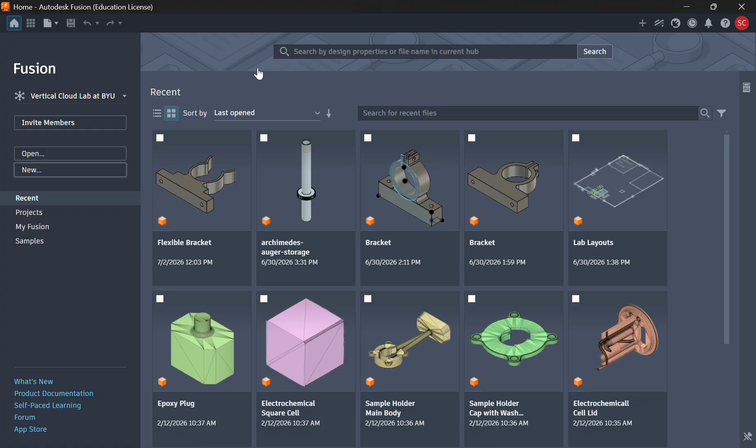We want to make this part as close as possible to the previous version. So I'm going to go to Open here. I don't know if you guys can see this, but I'm opening from my computer. I'm just going to go down to the auger bracket and bring it in.

Now this is a step file, which is nice. An STL file works, but it's very difficult to work with. Step files, CAD software really just recognizes really easily.

So I'm going to go up here to this measure tool and click on this face and measure that in relation to this face. We got, okay, that's 60 millimeters across, that kind of thing. So step files are really easy compared to an STL file.

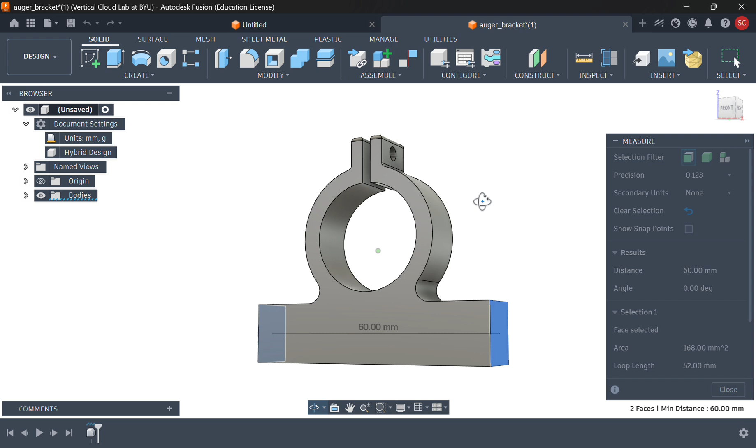With an STL file you have to kind of just guess in a lot of different places, and that is really difficult and takes a lot longer and is not nearly as accurate. For example, this might have shown up as 62 or 58 or something like that, so not as accurate and much harder. Step files are the way to go with this kind of thing always.

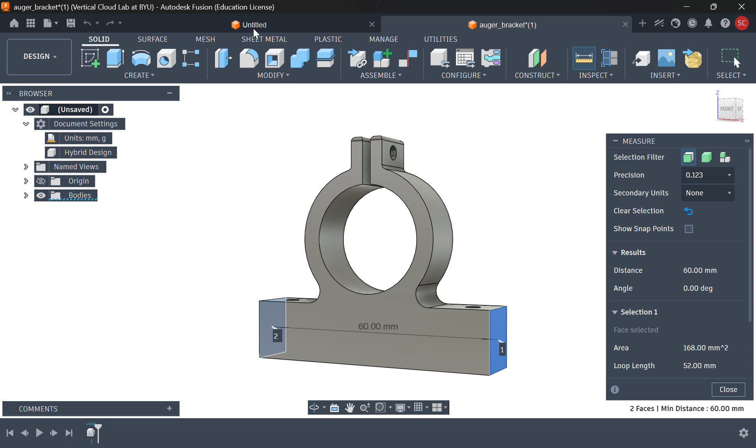Okay, so now we have this new untitled open part. The nice thing about this bracket is that it's not super complicated, and right now it's pretty uniform the whole way through.

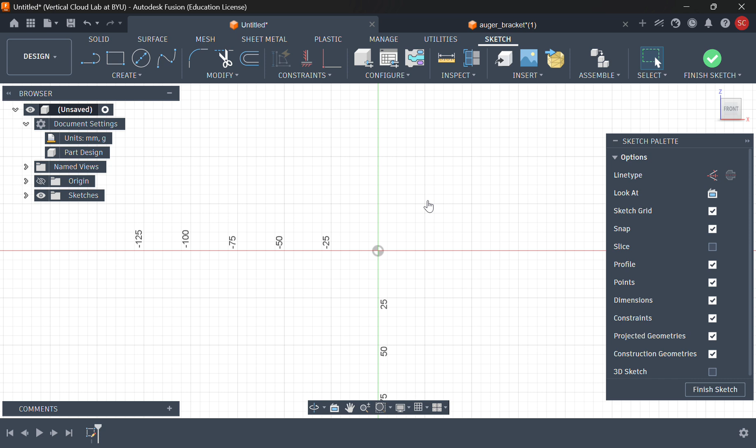So we can just make one sketch and then extrude it, and we'll add some fillets and some holes, but that's just about it. So I'm going to come here and make a sketch. I'm going to put this on this face here, and then start off with a rectangle.

Now this rectangle should be, like we just saw, 60 millimeters across, and should be how tall? 60 millimeters across, and 14 millimeters tall. Okay, nice.

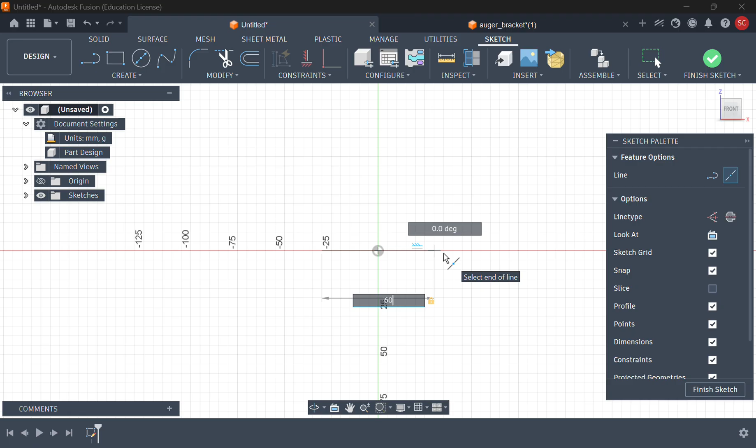So I'm going to start this with a midpoint line here, so that the origin is at the very bottom. Just going to click, so now we have a 60 millimeter line.

I'm actually going to make this one a construction line. Take this up, so we're going to make it 60 there, and then 14 tall.

Great. So now we can come back over here and say, okay, so what else do we need? We need these diameters.

The diameter of this is 33.5. The diameter of the inside is 25.5. Just to check there: 33.5, yeah 25.5.

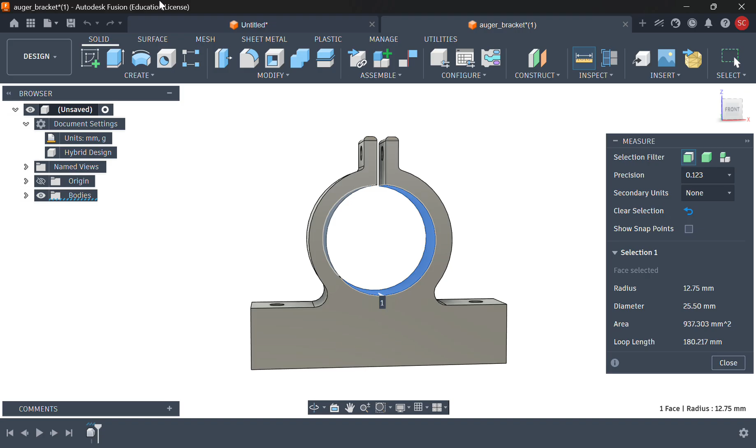Let's see, so now I'm going to come up here and make a circle. From up here, I'm not going to worry about the distance yet, but 25.5 there, and another one, 33.5. There we go, it's looking pretty good.

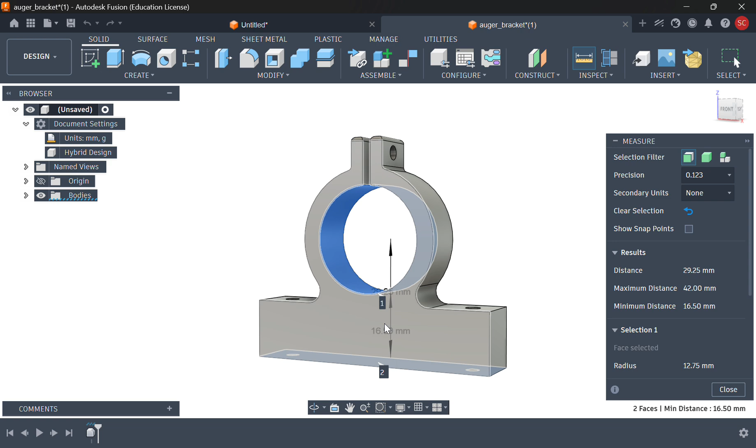Yeah, that's great. So now we need to know how far up this is from here. The hard thing about this is that it gives us two different ways to do this: we can either have 16.5 up to that bottom rim there, or we can have 29.25 up to the center there. So I think let's go with the 16.5.

You can do this either way, but I think it automatically, let's see, so let's add a dimension. If I go there automatically into the bottom, it's automatically going to do that. So let's say that is 29.25, just to double check.

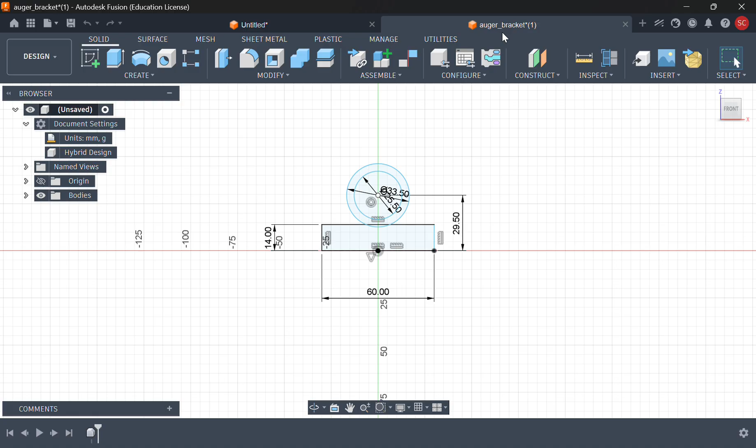That was 29.25. Okay, so then you just come back here. 29.25. Nice. Okay.

It's not letting me zoom in for some reason. One of the reasons that these are still blue is because they're actually not limited to just that axis.

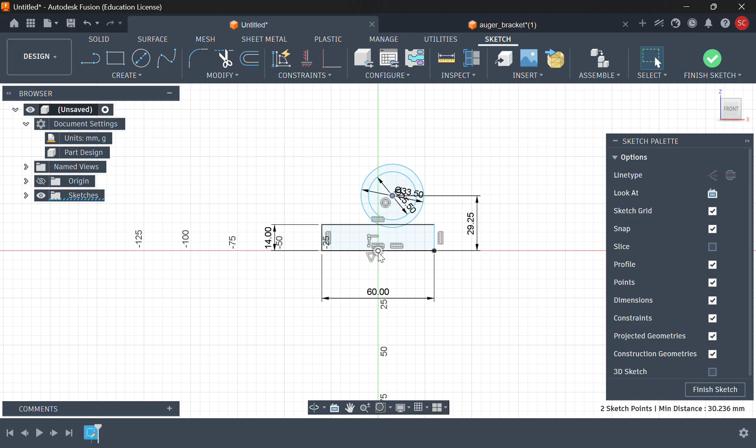So if we take that and we go here, then we take this, and we take this, and come up here to constraints and say horizontal, vertical, that's just going to put it at the verticals. And we know for sure that it's vertically aligned to that bottom part. Okay, so we have that.

So you can see on here, there are fillets here and that kind of thing, and holes here. But we're going to add all that stuff later.

And same thing with the fillets up here. We'll do that later and these holes. So now we got to do these. This is across the whole thing.

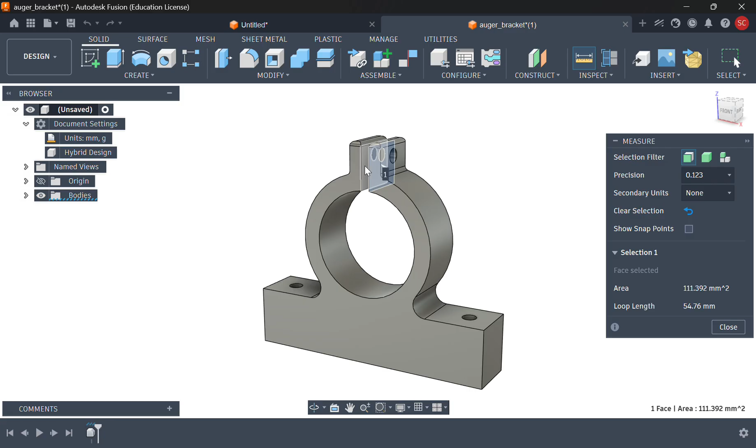That is 8 millimeters across, but each of these is 3 millimeters. So if we look at the middle section, this is 2 millimeters across. And that's nice because if we know some of these relations, we can take this and just align it. I'm going to make a rectangle from the center point, put it somewhere up here, and go like this. So this should be 8 across.

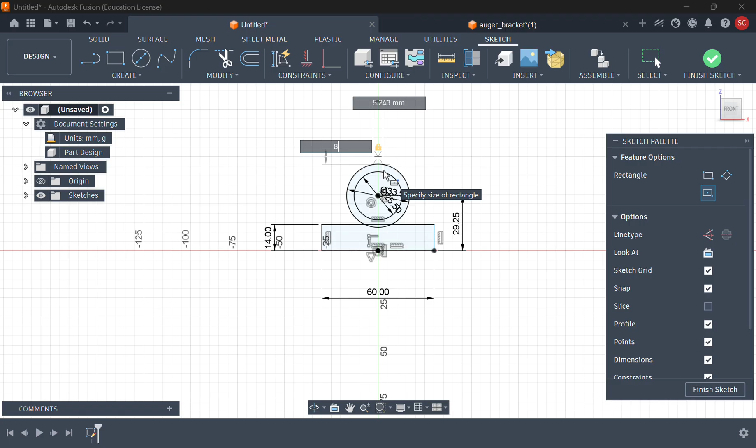That was tall. Actually, we didn't look at the height, so I'm going to go back and try this again. So let's inspect, go up on top. It's not letting me zoom for some reason. I don't know if it's just the way this works.

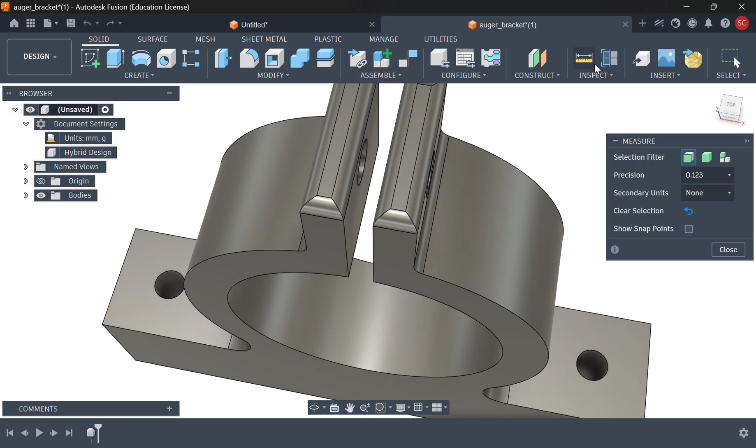There we go, okay, let's zoom in a little bit. So we're measuring, let's zoom in a little bit more. Okay, so we're measuring the height of this, from right there to this edge right here. That is 11.03. It's at a little bit of an angle, but I'm going to say we can suppose that to be 11, right? If it was straight down, it would be 11. Move it over a little bit, it's 11.039. So we'll call this 11.

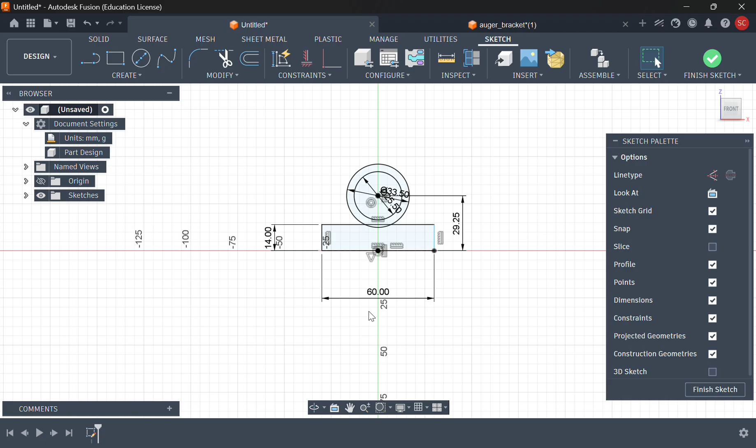Again, these parts were originally designed by AI, and some of the dimensions are a little wonky. I'm not really sure why they did it that way, but it was not up to me.

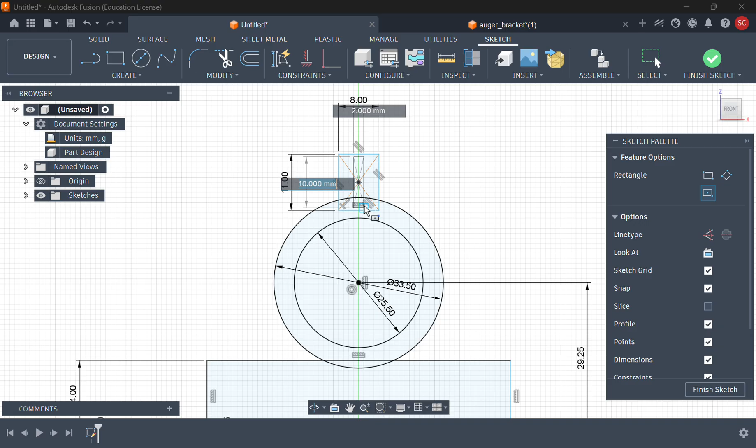Okay, so I'm going to make a center rectangle, put it here. I'm going to say it is 11 millimeters tall and 8 millimeters wide. And then we're going to do another one inside there, another rectangle. That one will be the same height. It'll be 2 across.

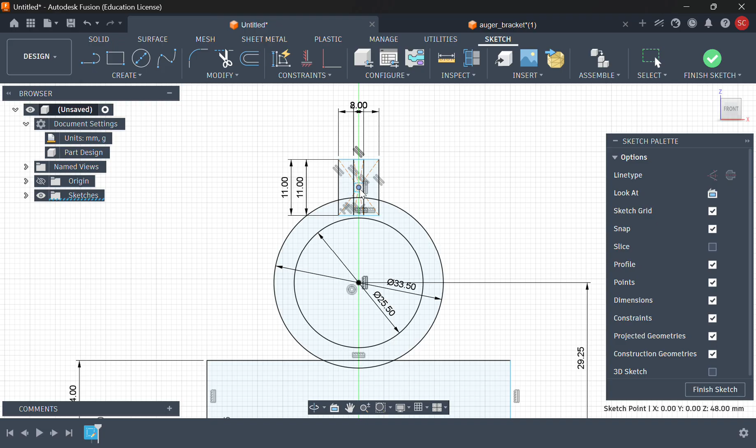Now, just like these other ones, the circles from before, these aren't actually connected to anything. So I'm going to take this and this center point here and make them vertical again. So now we've got that, but they're still not aligned to anything or constrained to anything right there.

So I'm going to come in here a little bit closer. Now we want these points to be on this edge, so that as it comes up here, it connects here and goes straight up. So we can come up here and say coincident, and then look at that, they're all... yeah, there's no blue lines. Everything here is constrained. Okay, so that looks pretty good to me.

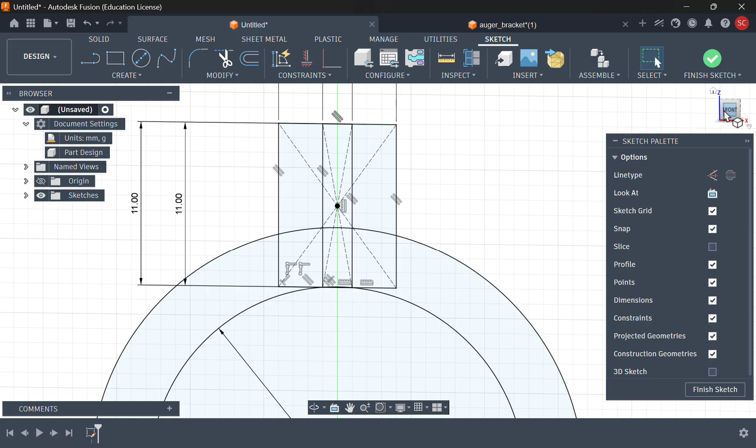That just changes the orientation, that's not what I meant to do. There we go, so that looks pretty good. So now I'm going to finish the sketch.

And go in, we can use the extrude tool. So now we just have to select the areas that we're trying to extrude. I want this bottom part for sure, this part, this part. And here you've got to be a little bit careful. If I click this middle part, then it'll extrude that as well.

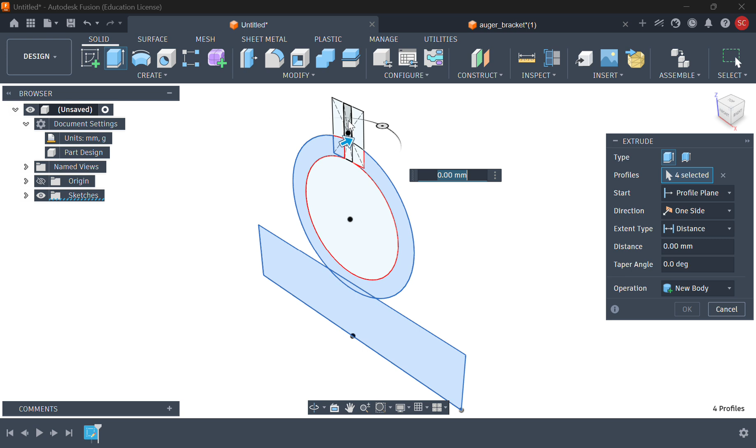So let's see, oh, we forgot to look at how wide this is. We come over here, you can say, okay, so this is 12 millimeters thick, or deep. And as we're using this tool here, selecting things, we can say, okay, we want to go 12.

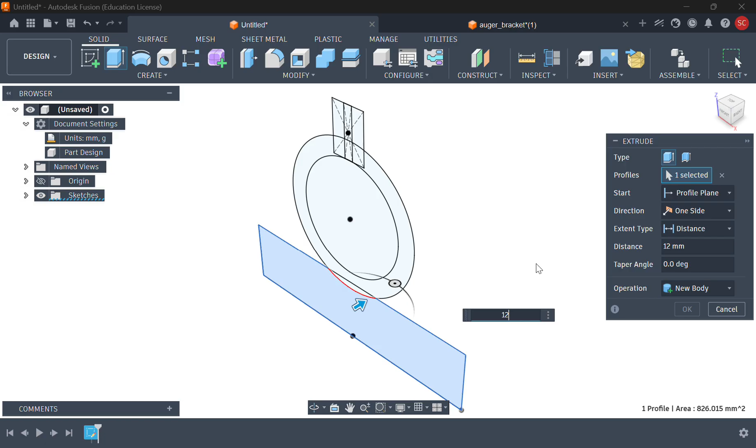So as you can see, it's adding all these different portions as we click on this. If you click on this, right, that's not where we want this to be, so unclick that portion. We can get all the rest of them. So that looks pretty good, I'm going to say okay. That's about where we need to be, so that's great.

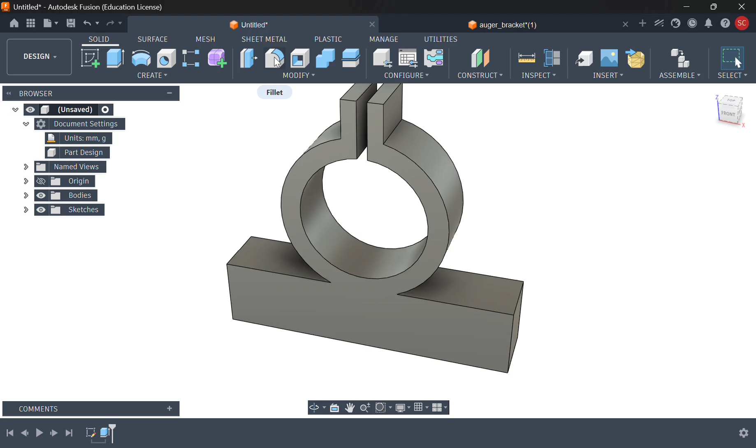We can add some fillets now, or maybe holes first. Either way, we'll do the fillets first. I'm just going to select all of these corners. I think all of them are the same, I think they're all 3 millimeters. So we'll do those, and then we'll add some more.

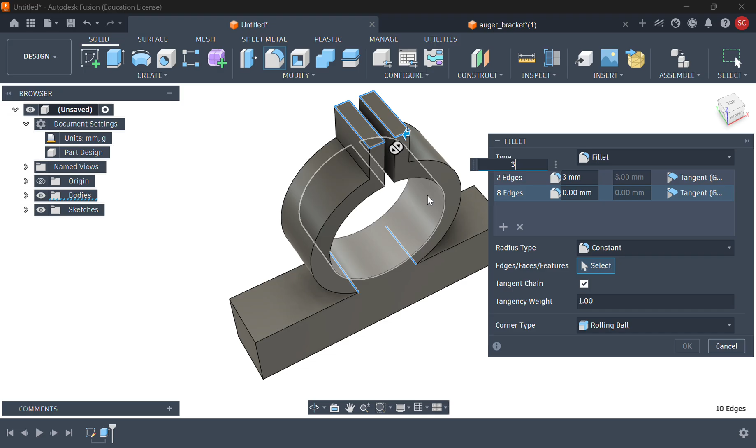1, 2, 3, 4, and 1, 2, 3, 4. Oh, not 3, let's try 1. There you go, that looks more like it. Yeah, I think that's accurate. I'm going to hit OK. So I just kind of guessed there because I've seen this quite a lot.

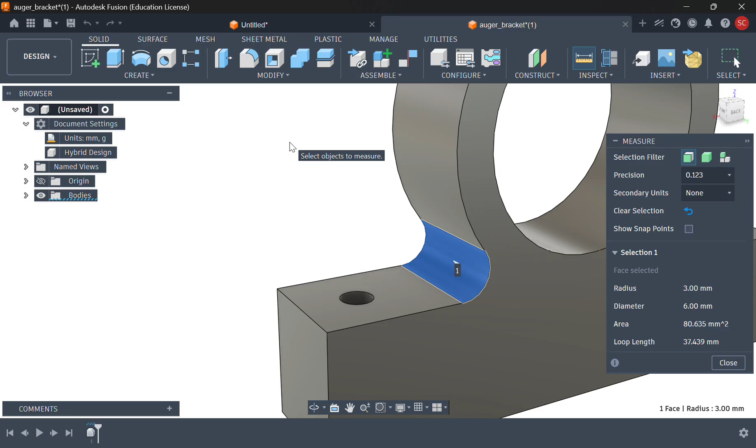But if we wanted to check, again, we can go back here, say okay, what's that? Diameter is 2, radius is 1. So that's how the fillets work. And same thing down here, make sure we don't want distance. Yeah, radius is 3, diameter is 6.

So we got that right. Okay, so now the only thing left is the holes.

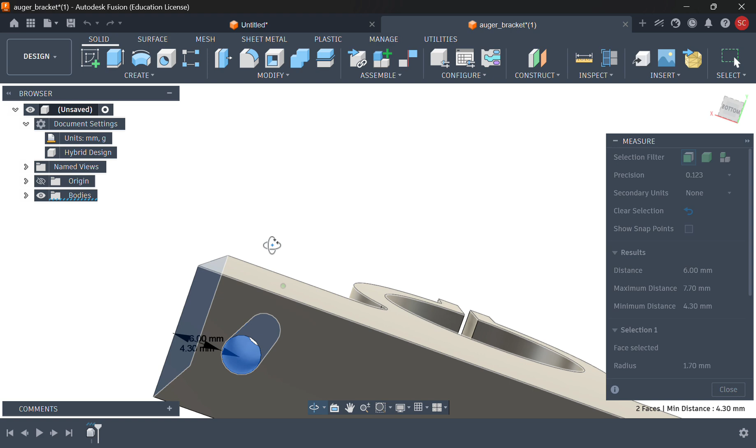So we'll come down here and look at this. How far away are these holes from these edges? We got a hole that is 6 millimeters - 4.3 from this first edge, but 6 from the middle of the hole, which is helpful. So 6 there, and from this side to the middle is also 6. Perfect, that makes it really easy.

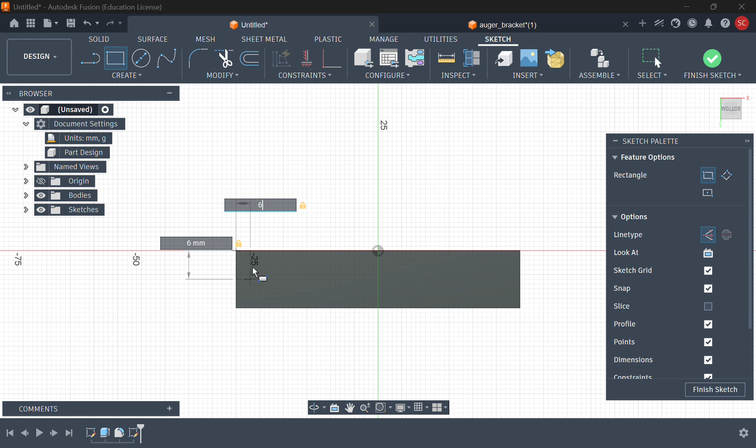So I'm going to make a sketch on this bottom face, and take a rectangle, make it construction lines. I'll say this is 6 by 6. I'm going to do the same thing on this side - you don't have to do it on the opposite corner, that's just how I like to do it.

And then we'll take these circles, also make them construction lines, but we're just putting some circles there. You can make them 3 or whatever you want - I'll show you why in a second, why this doesn't actually matter.

As far as parametric design goes, I just made these both 3, but it's nice to select both of these and say that they're equal. That means we only have to change one thing - if we change this to 4, then this one changes as well. So that's nice, just a good thing to do. We could have done the same thing with all of these.

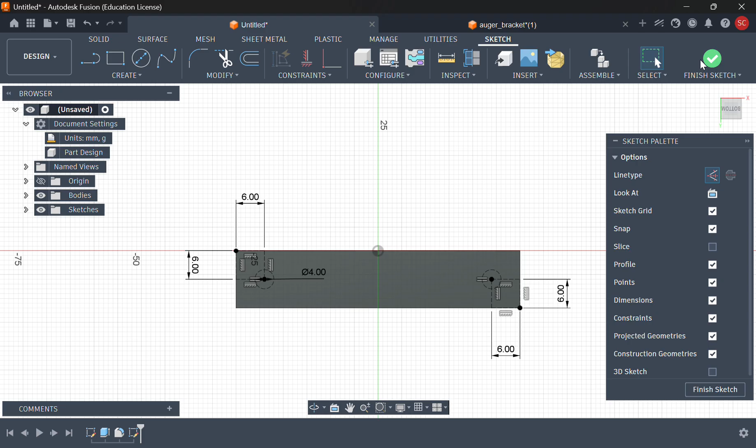So we're gonna finish the sketch. All of these lines here are construction lines, so they don't actually matter in the real world - they're just like pencil drawings on something. Now we're gonna use the hole tool to do the rest of this.

On this hole tool, we can just select certain features around which to put these holes. So now these holes are linked to this spot. Technically, we don't have to have a construction circle here for the hole, but it just reminds me where the hole is going to go - it's kind of helpful.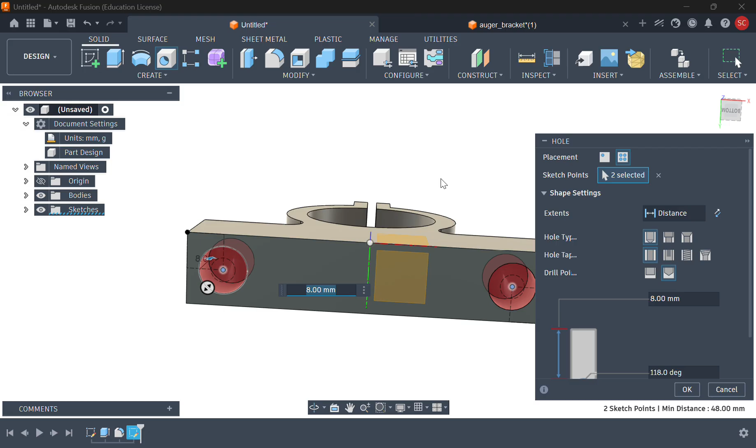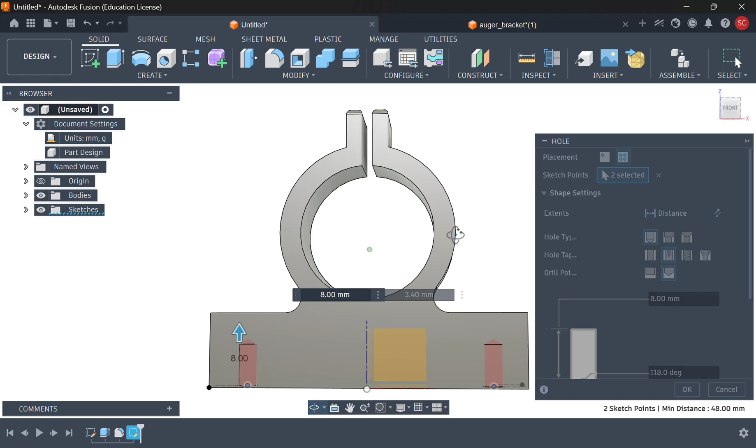Okay, so now, we got a couple options on this side, and we can pick how thick the hole is, all these things. We're going to go over here to clearance, and that's based on a certain screw size. We are using M3 screws, so I can come down here and say M3. If we wanted to, we can make these tapers - we could say there's a counter bore on there, so the head of the screw can also fit in, but we're just gonna keep it simple.

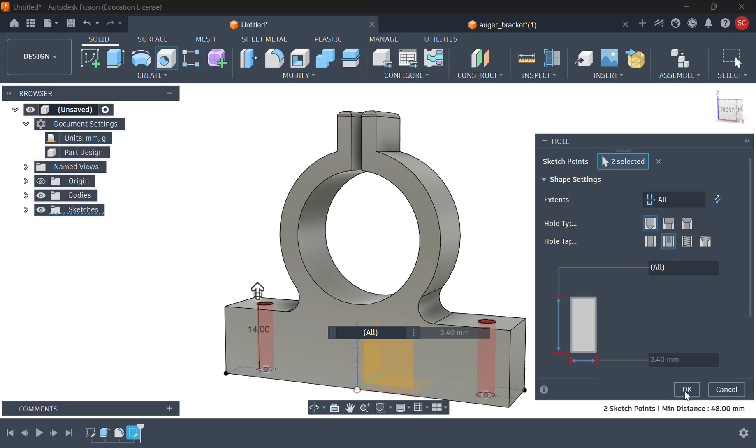It changed back, so I gotta change back to M3. And instead of distance, I'm gonna say all, because we want this to go through everything - all the way through everything on there. And there we go, now we have holes right there.

So let's do the same thing on that top face. I'm going to come in here - I guess we can just inspect it. If you have to, you can make a sketch too, but this just works just as well. From the side here, that is 6 millimeters, same thing - actually like 4.3 to the edge, which means this is the same size hole as well, and 6 millimeters to the center.

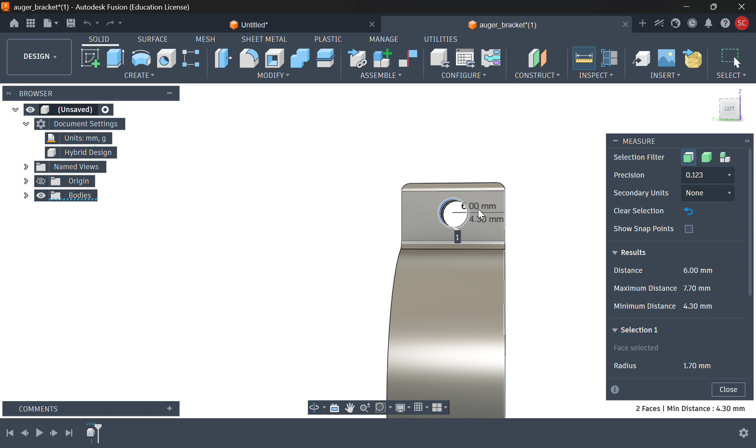And then same thing here, I gotta zoom in, and to the top, 3.8. This top part wasn't changed by the fillet, and that's how we know that.

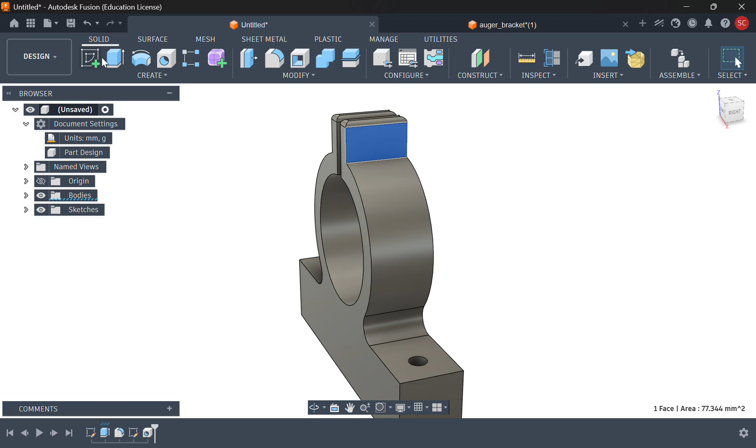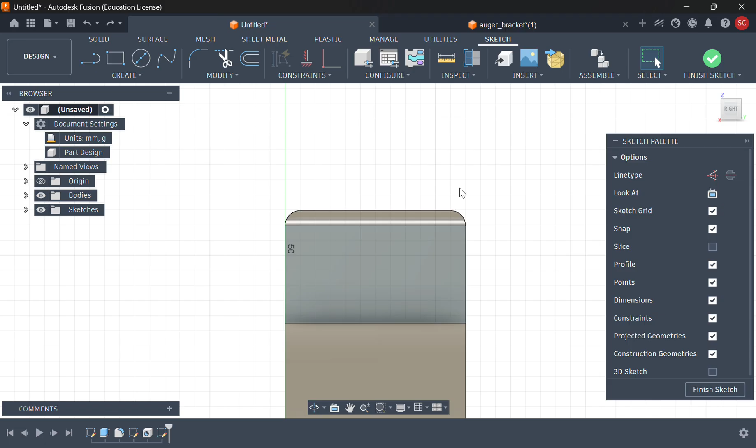So 3.8 from the top. We're gonna come here, I'm gonna make a sketch and zoom in just a little bit. I'm gonna do the same thing - go up here to this corner, say 3.8 down and 6 across, and then right there. Oh, and I forgot to make this a... I'm gonna hit Control Z actually, because I want this to be construction lines. Let's try that again - 3.8 down and 6 across.

There we go, and then a construction circle here - let's say that's 3, call that good. So then same thing - you can go up to the hole tool, select this point right here, and our old stuff is already in there. Actually, no it's not. Yeah, M3 screw, there we go.

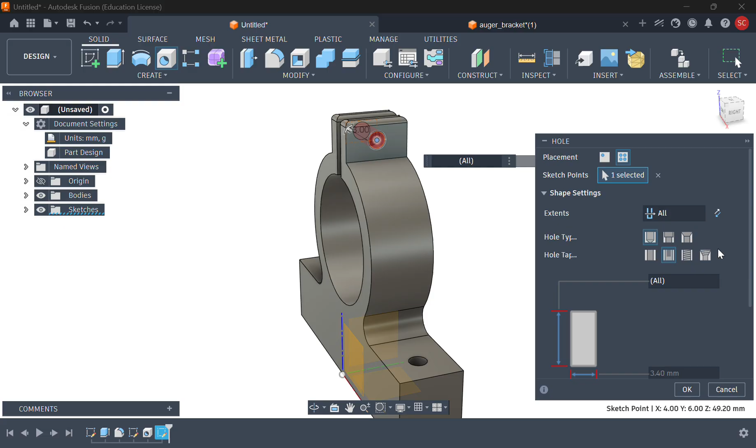I had to click on all here, so it goes through all, but the distance was big enough anyways. But you can see it does both of these tabs at the same time. So yeah, there you go. That is the bracket as we have created it, which is great, and it has worked well for us.

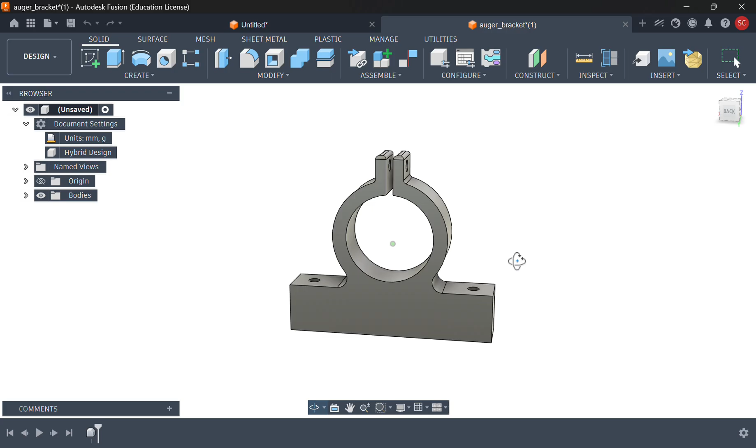We did run into some problems. In the first design, these brackets were set pretty far apart, and then in a later design we brought them a lot closer together. And so the stepper motor actually cuts into this little area here.

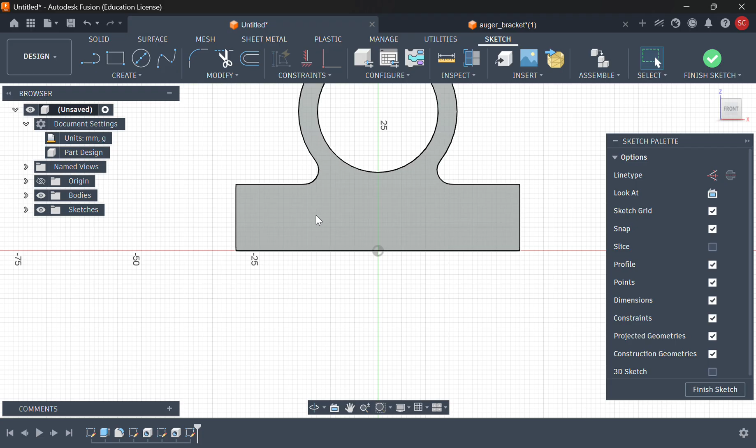So I'm going to change this bracket over here to allow for some area there. And then just for ease of use, I'll do it on both sides just so that it doesn't matter how you orient things. We're just going to come in here, and do the same as we did on that previous sketch.

6 down. But then we're going to go a little bit more. We'll say 12 over. Oh no, we want 6 there, and then 12 over here. So do that, and then same thing on this side.

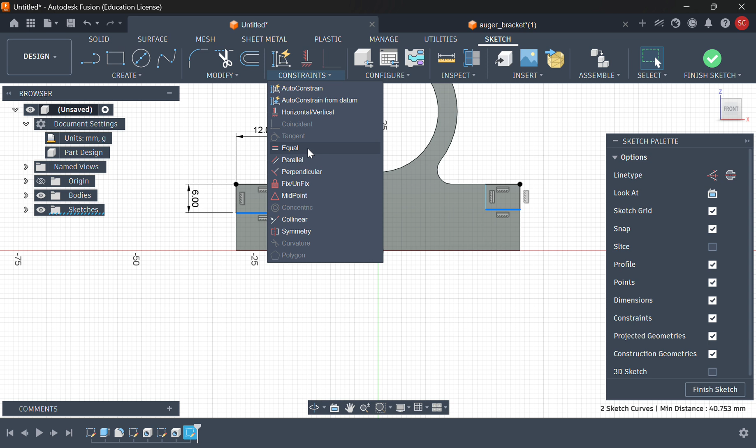And again, just for reference, these you can select and then say that they're equal. And you can say the same thing with these. This one and this one and this one. Let's say that they're equal. And then there's no blue lines, so everything is constrained.

Everything is attached to a point. But yeah, you know exactly where these things should be. Okay, so then with that, I'm just gonna hit finish sketch.

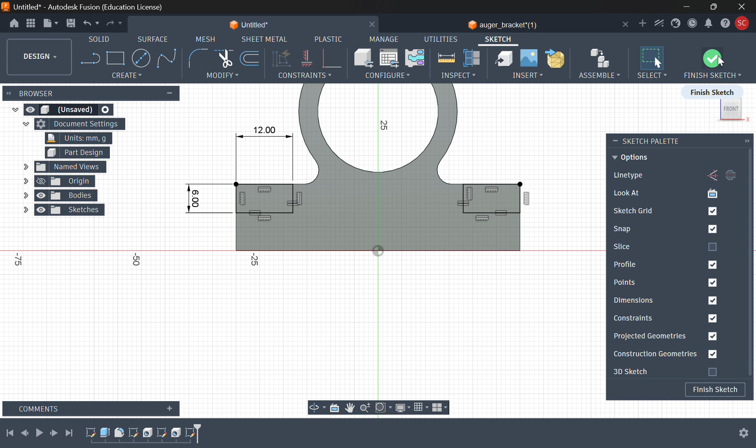We use the same extrude tool if we're making more material or cutting. Over here, I'm gonna say through all and then flip the direction here. And there we go, so that it just previews for what it's gonna cut, and it says the operation here is cut. Let me say okay, and there we go. So that is our new brackets.

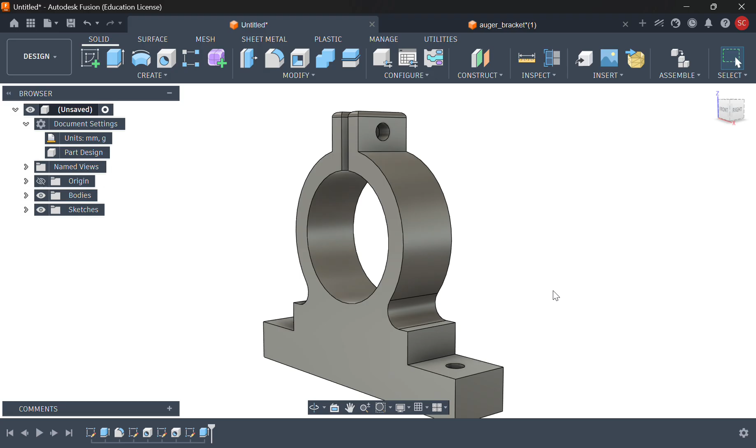They're not quite as pretty down here, but that's what we're going with. So yeah, in future versions, maybe we'll have a tapered hole here or something, or some kind of countersink so that the screws don't stick up either. But this allows for the stepper motor, which goes right here in this big area, not to interfere with the bracket.

But yeah, so these are the brackets that we've made, and then the nice thing about a design like this is that down here you have all of the different versions. So like if I go back to, okay, well I want to go back to right after we made the first holes, then we're all the way back here, and we can just go through these features.

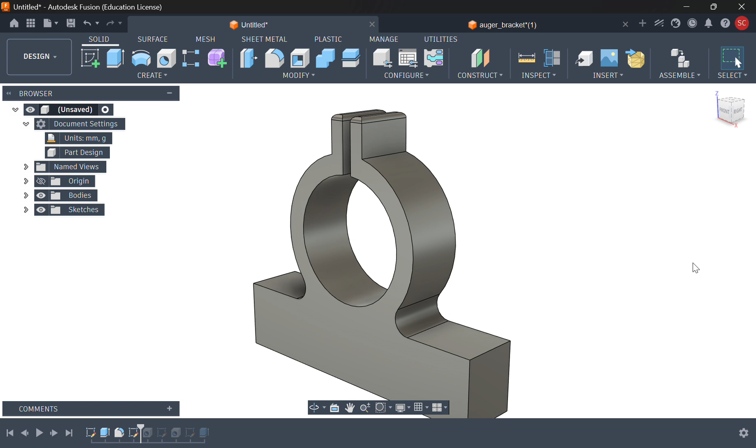This is when we only have the sketch down there and not anything else. The sketch is hidden right now, but you can see it right there, that kind of thing. And we can go back even before that, before we even did the fillets, or we just had a sketch that is hidden as well.

But yeah, and so that allows us to really easily change a lot of these things, a lot of these features. For example, if we go back to home here, we've made this flexible bracket based on that same design where you can snap it in and snap it out, the auger, instead of having to rigidly slide it on and then screw it.

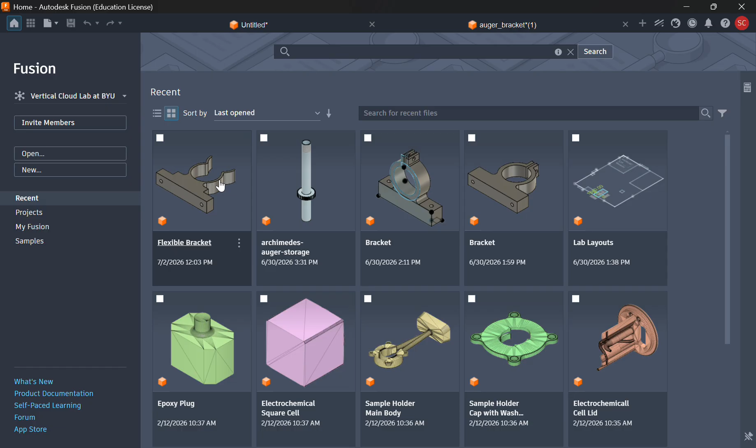So yeah, so then just to save it, I'm just gonna hit Command S, Control S, depending on what you're using. I don't know why the Q is right there. Hit Escape, there we go. Okay, so Control S. I'm just gonna call this auger bracket recorded because we're recording this one.

And then you can put it in a specific project. I'm gonna put it in Powder Doser because that's what this is for. And then yeah, you can see here just for file management, I have original parts. So like that step file from before that I imported, I had already imported it, so that's in original parts. And I also have the bracket and the flexible bracket.

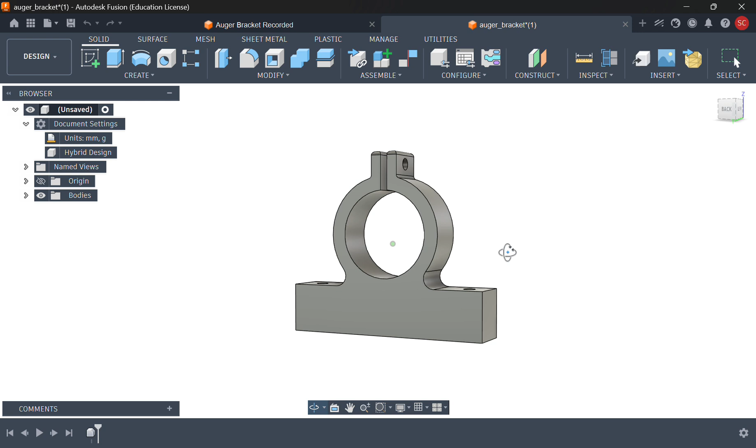Yeah, so I'll save that. It pops up here, auger bracket recorded, so that it's all saved. This one has a little star, meaning that it's not saved. I'm not gonna save this one because I already have it in here. But yeah, so that is the bracket, and yeah, really easy part, but also makes it good for introducing Fusion. And yeah, we'll get to more complicated parts in a little bit.